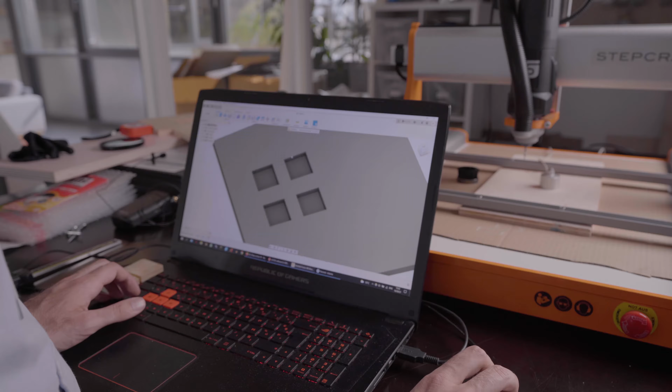I'm going to be focusing on these simple pocket-like geometries where it's very easy for a beginner to understand what might go wrong. I'm just going to be designing 4 simple pockets, each one of them with a very simple difference. The first pocket that you see me designing here has no internal corners. The second one will have internal corners with a radius. The third one will have T-bone fillets, and the fourth one will have dog bone fillets.

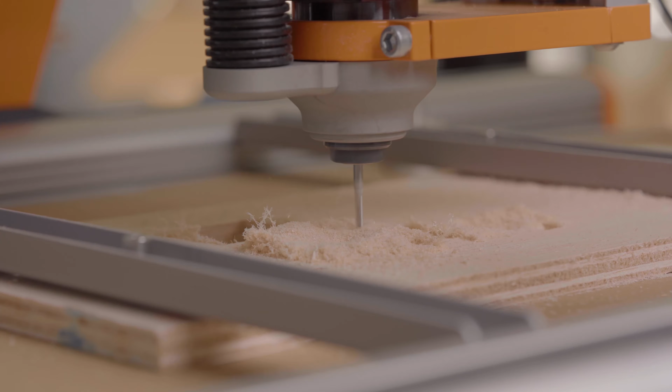We're actually today going to be milling them on the Stepcraft that I have brought over here, which is the little desktop CNC milling machine that we use for didactic purposes here at the office.

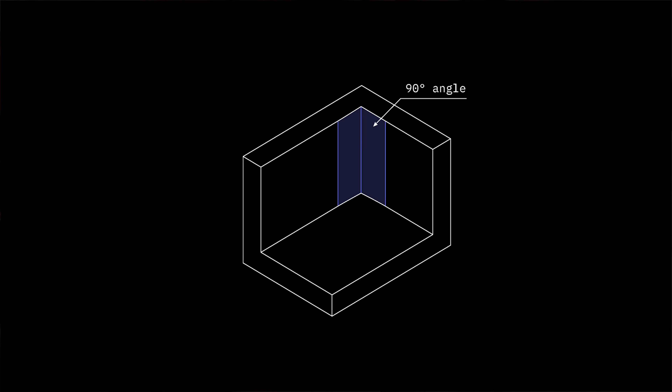A sharp corner would be defined as this, meaning you have a corner and then that corner is sharp. When you're working with CNC machining as a technology, you have round tools, what we call milling tools. The problem with those tools is that when they try to go as close as possible to that corner, they're going to be blocked, and there's no amount of effort I can bring that is going to make this tool able to reach this little corner, and that's why internal sharp corners are so problematic.

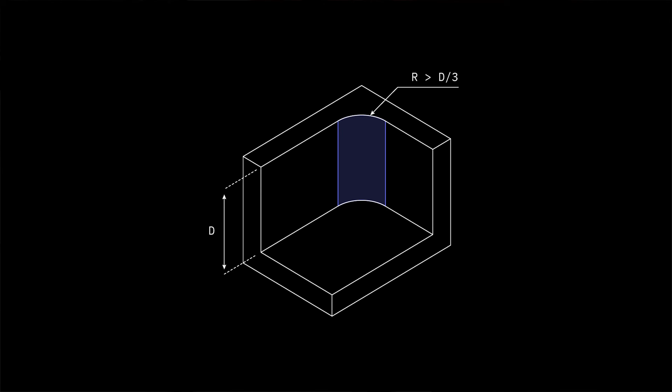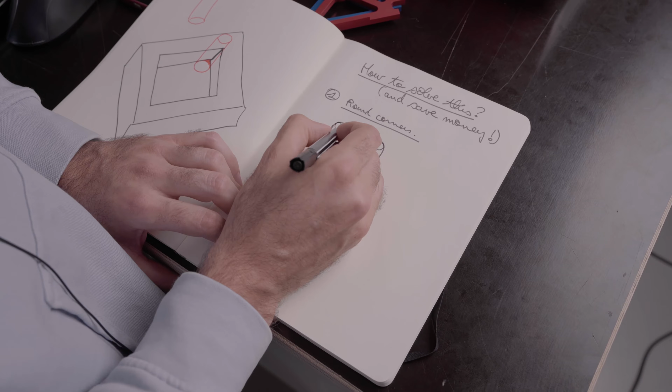So then you're going to be asking, how can I solve this as a designer, and how do I save money? Basically the first and easiest way to save money is to have round corners. By having round corners, you make sure that you have a geometry that actually follows that of a milling tool. You're just going to have a geometry that is followed very easily by the tool, so you don't have any mistakes, errors, or difficulties met by the machinist with that kind of design.

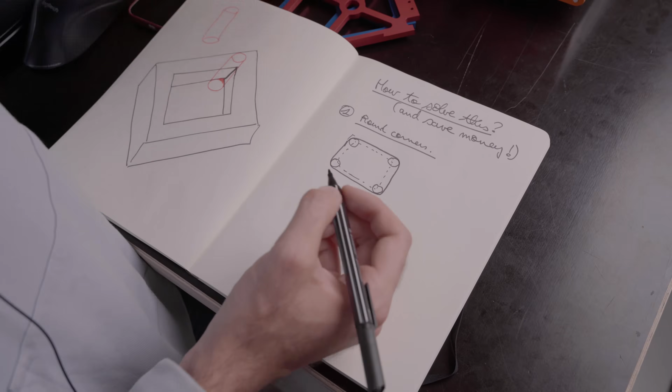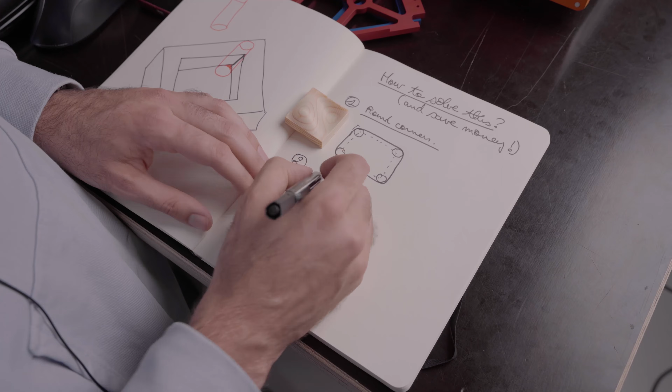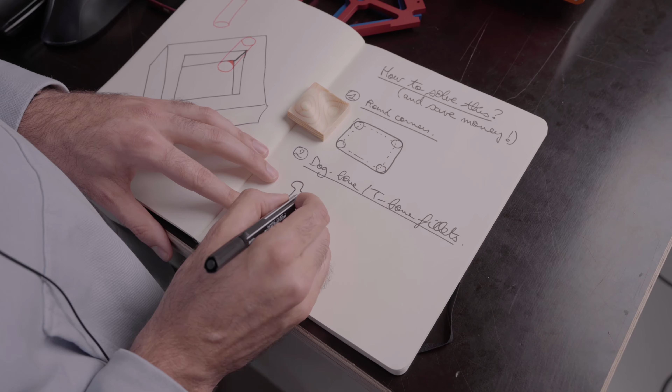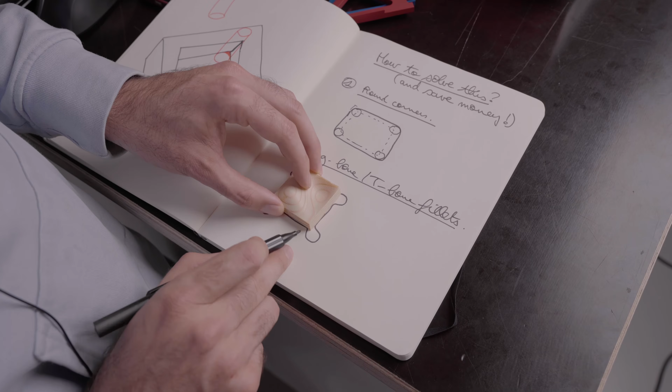Now, the second problem: if you need to fit a square part inside of your pocket that doesn't have round corners, or if you don't want to spend time designing that part to have round corners, what you can do then is have what we call dog bone or T-bone fillets. When you do dog bone or T-bone fillets, you add a relief radius so that there's actually going to be a space for the sharp corner of your part to fit in without getting blocked on a radius like here, which would cause, of course, the part not to fit.

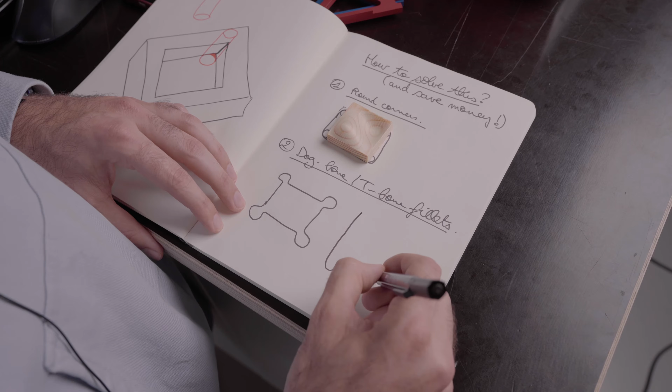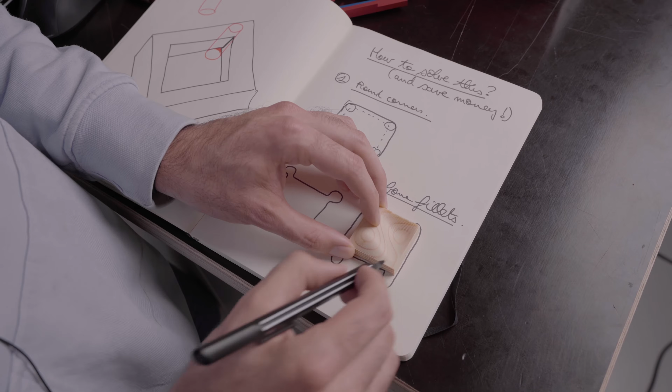And then, of course, you have the even easier one, which is to make a T-bone like this that looks a little bit like a hat or a bear, depending on how you want to look at it, or a bone in the shape of a T. And then just having those relief holes where the tool can escape. Ideally, these are of constant radius. Then you have a little bit of a relief hole that makes the milling tool go in and exit in a very clear way, and then you have internally a 90-degree angle on which your 90-degree sharp external corner can fit in very easily.

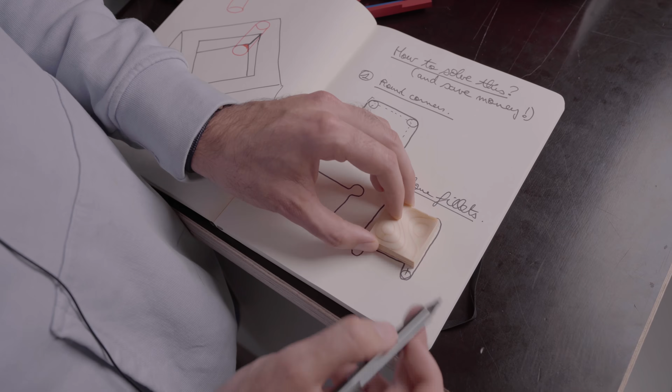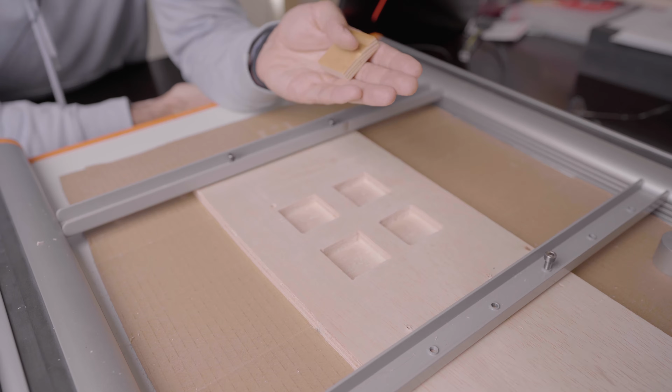Basically, this first cavity here, I tried to tell the machine to machine it with sharp internal corners, and what happened, because my milling tool has a radius, the machine ended up telling me that it's not possible to machine those, and then it ended up machining it at a radius. So here on the second cavity, I designed this one with a 3mm radius, which incidentally is the radius of my milling tool, making me able to save time and money. But this is a controlled choice.

The only inconvenience in making a round corner internally is that it may impact assembly. So I'm going to be showing you with the simple little assembly that I made here another part. It's the male part to the female pockets that I made here. If I have a male part that has sharp external corners and I want to be assembling it in a cavity, then this is where the T-bones and dog bones that we spoke about can come in very handy without the use of very expensive tools like EDM.

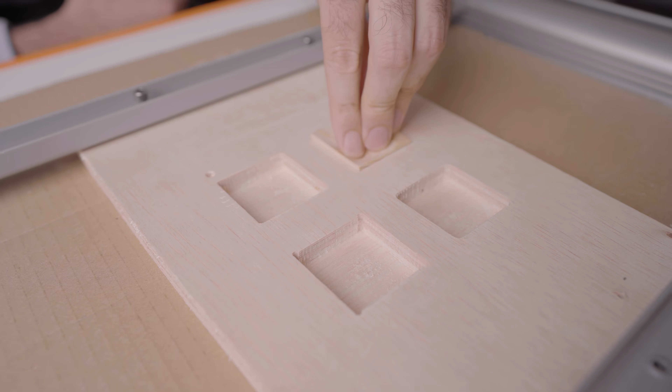So if you look at the third and fourth cavity that we have here, this one we made with what we call T-bone fillets that we presented earlier in the drawings, and you can see how having those relief radii makes me able to insert this part inside, and these are the little radii that make it so that a square part can fit inside of this not so square hole anymore. And then the other one, dog bone fillets, which is a slightly more elegant solution, just adds a little bit of relief, and you can see that I'm able to fit this part in perfectly as well without having to design sharp internal corners.